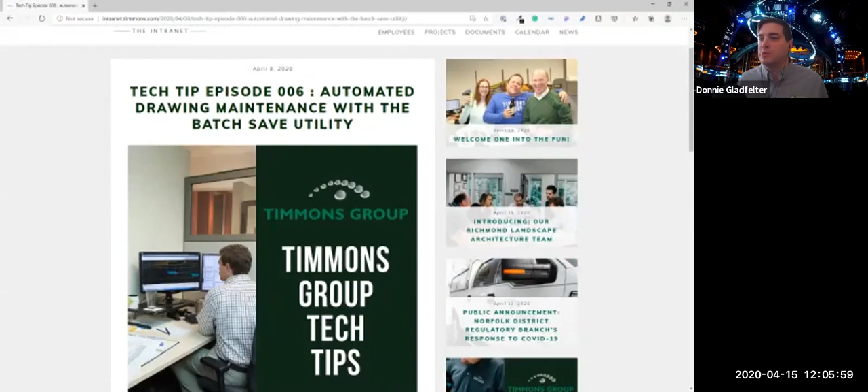If we come over here to Documents, we have all of the tech tips published right here as well. So here you can see all of the various tech tips, go back and see past episodes, or just search for tech tips. Here's the latest tech tip, which is focused on a lesser known utility of Civil 3D called the batch save utility. We'll hit on this during today's presentation as well, but if you haven't already, I encourage you to take advantage of this resource.

Next, we have the targeted training, which is what I like to refer to as this style of presentation, focused on something a bit more tactical and specific. It's not the broad sweeping 'learn how to use everything in AutoCAD or Civil 3D' approach, but instead focused on a particular area. And like I said, there are a few other things coming soon.

Speaking of training and what's coming soon, there are two things I'd like to share. Hopefully you saw my email sent out yesterday, but we're going to be doing another one of this style of presentation next week. That one is going to be 'A Match Made in Coordinates,' bringing Revit, Civil 3D, and InfraWorks together at last. This is a topic many of you have reached out to me and asked about. It's also a presentation I've delivered at Autodesk University, so we'll be doing a cameo appearance of that presentation next week.

This is about trying to georeference Revit models and making our Civil 3D data flow more easily into Revit and vice versa. We'll be hosting that presentation same time next week, except we're going to shift things to Tuesdays instead. So next Tuesday at lunchtime, we'll be delivering that presentation.

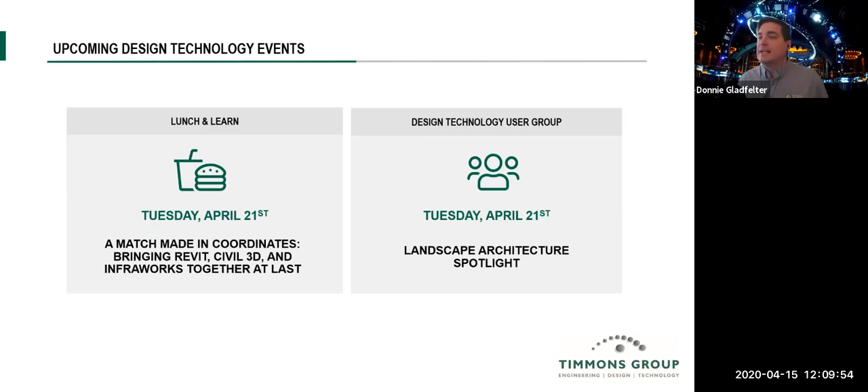So enough of the talking head piece - let's get into really the meat and potatoes of the presentation today. In terms of learning objectives, these are pretty broad, because really it's about finding ways maybe that you hadn't explored before to better leverage AutoCAD in some capacity.

Now with that said, I always like to put the disclaimer out there for tips and tricks webinars: my expectation is if you are an AutoCAD user, you probably know at least some of the tips I'm going to share with you today, but maybe you don't know all of them. So hopefully there's at least one or two things you can take back to your desk after today's presentation and put to work. And of course, if you have ideas above and beyond what I share, I'm curious and eager to learn from all of you guys as well.

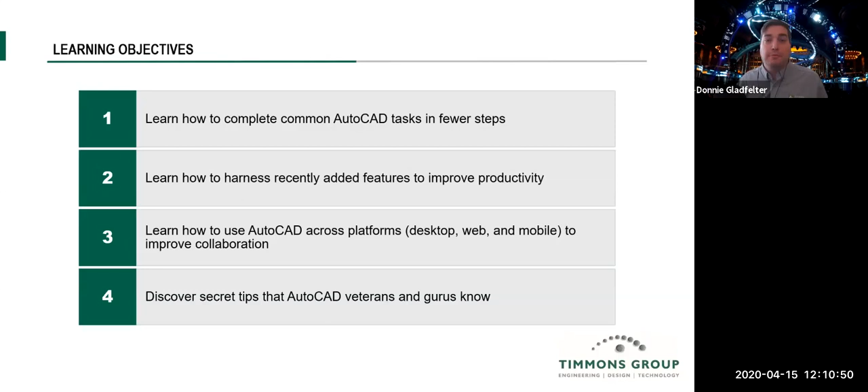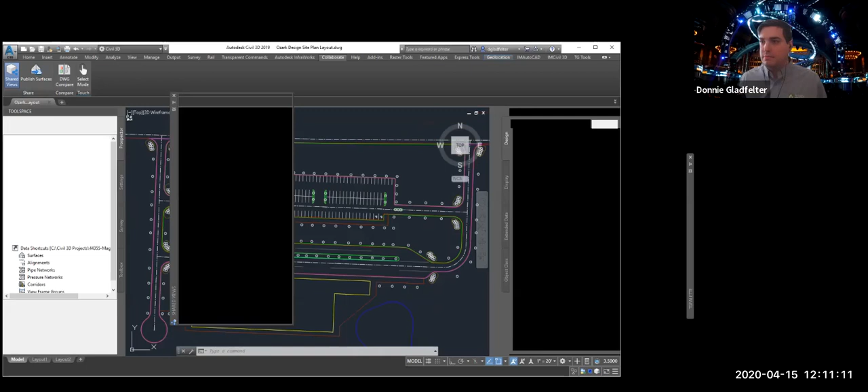All right, so let's jump on over to AutoCAD. Let me maximize this, and let me get my notes up on my other screen here. Okay, so let's do this. All right.

So I'm going to start just with some basic user interface stuff. We all like to personalize and make the user interface our own, and that's awesome. A few annoyances that I have - one of the first, especially being on the civil side, is that the default user interface no longer has our coordinate readout.

Now, this was one of the tech tips early on, but just a very quick and easy tip here: if you click on this little hamburger icon, as they call it, down here in the bottom right corner - right there - you'll have all of the various things that we can add to the status bar displayed to you.

There's a couple others I'm going to share with you here too. The first one is just to add the coordinates. That will give you a coordinate readout at the bottom. If you haven't discovered that one, that's a really helpful tip. As you mouse around in the software, what you see down there will be the coordinate readout for your project. That's super helpful, I think incredibly required, especially in the world of civil engineering drawings.

So let's take a look at a few others here. I'm going to pick on the sample surface in this particular drawing. You're probably accustomed to using the full properties palette over here. I typically dock it on the right-hand side of the screen. You might choose to put it on a whole other screen entirely, totally up to you. As AutoCAD users, we are very greedy when it comes to our screen real estate, and that's totally fine.

Now, something else we have available is quick properties. I have it turned off right now. This is another one of those things that if you don't see it in the status bar at the bottom of your screen, you can pick on that little hamburger icon.

As an aside, I don't know why people call it a hamburger icon. I see more of a stack of pancakes. I don't know who's team pancake, who's team hamburger. I guess it depends if you're a breakfast or lunch guy. But this is a lunch and learn, so maybe it's better calling it a hamburger icon.

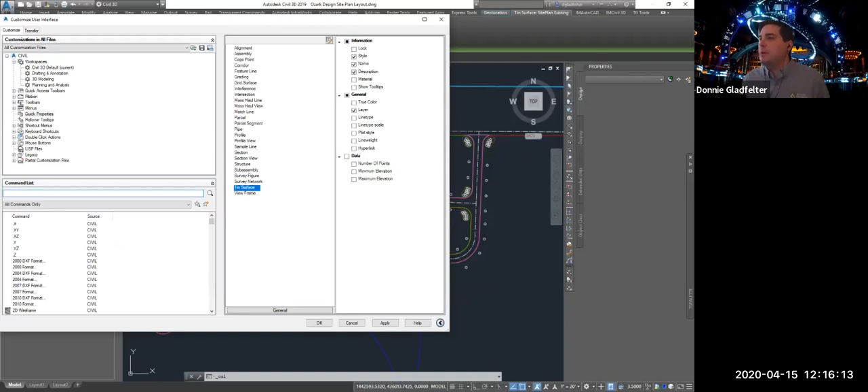Now, out of the gate, this looks a bit intimidating. I totally get it, it takes a little learning and acclimating to make it useful for you. But nonetheless, all of those properties I saw, let me pull this down a little bit, see if it'll let me resize it. Here we go. So all of the properties I saw over here in the full properties palette are also available to me right here as well. In my case, I liked all of that data information, I found it useful, so I can just go ahead and check those on.

Okay, I'll go ahead and commit those changes. Now when I pick on my surface, the quick properties that it displays will include those additional properties.

So I can see the number of points, and I can validate and verify that I don't have any bad shots in the surface at elevation 0 or something along those lines. Again, you can customize anything that this shows. I think that's super helpful.

All right, so we'll continue down this path of the user interface for a bit. The next drafting aid that I find incredibly helpful is something known as selection cycling. This was a new feature several years ago. Autodesk made a big splash about it, and then they took it out of the default status bar. I don't get the logic, but nonetheless, it's not here by default.

But in our civil engineering drawings, where we all know a civil engineering drawing is not complete unless it has 987 layers inside of it and an equal number of things drawn on top of each other, if you're trying to make sense of all that chaos, selection cycling will be your friend.

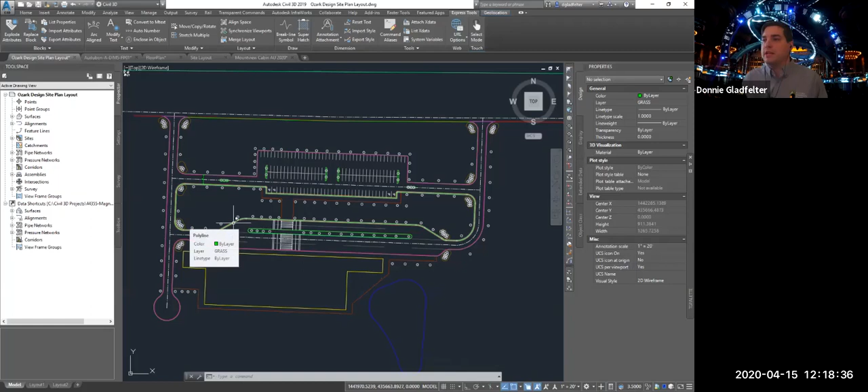So Murphy's Law says as you try to select something in AutoCAD, it will select the object you don't care about. What you'll notice is when I hover over things inside of AutoCAD, there's a little glyph now that pops up by my cursor. Whenever you see that, when you have selection cycling turned on, that means AutoCAD is a little confused about what it is you want to actually select. So we can leverage this to our advantage.

So when I pick on this now, what I'll get when I have selection cycling turned on, this guy right here in the status bar, I will get this little menu, and it will let me cycle through all the stuff that AutoCAD thought I may have wanted to select in the first place.

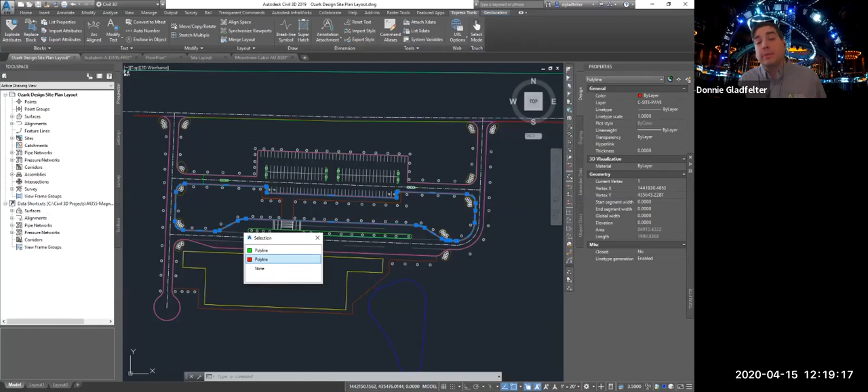So again, maybe I wanted the edge of pavement line, which I happen to know in this drawing is red. We can go ahead and pick that right here, and just like that, we have that object selected.

So again, in civil drawings, I find selection cycling an incredibly helpful tool.

All right, so I'm going to bounce around in drawings here for a minute. I'm not sure how folks typically address this, but there's the great debate among AutoCAD users as to what we set our LT scale at. This seems to be one of the really hotly debated topics: do you set LT scale to the model scale, what do you set PSLT scale?

So just a quick bit about line type scale, or LT scale as we abbreviate it in AutoCAD. There are actually 4 LT scale variables inside of AutoCAD. The first and foremost that everyone knows is just regular LT scale. So if you type in LT scale, that's going to be your entire drawing's line type scale, affecting every line in the drawing.

Above and beyond that, we have 2 variables that complement that: one called MSLT scale for model space line type scale, and the second called PSLT scale for paper space line type scale. The 4th line type scale entity is called CELT scale, for current entity. Basically, it sets a default for any object you draw in the drawing. Not that you should ever overwrite the line type scale, but if you did, you could use that CELT scale to do that.

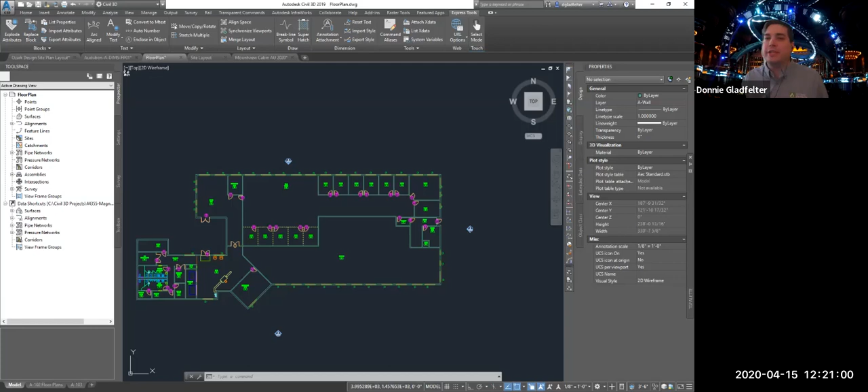Nonetheless, in this drawing, let me share with you my LT scale setup here. In this case, the LT scale right now—this is an architectural drawing, so the scales are a little different from what we're accustomed to—but it's set to 96, which in architectural world equals a 1/8 scale drawing.

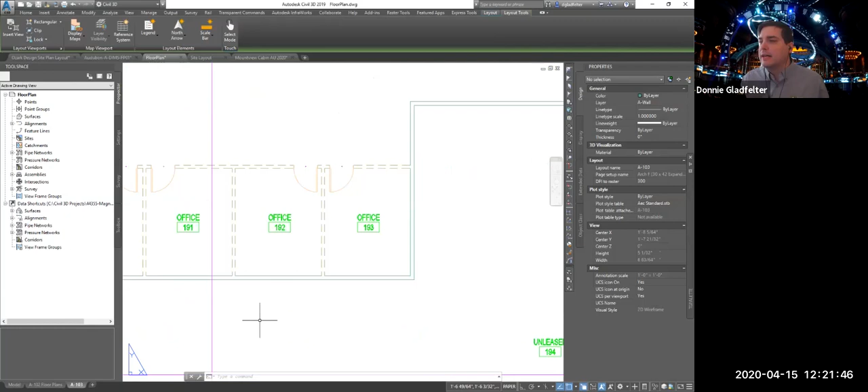Now, this is fine. Everything looks great here in plan view or in model space, but as soon as I switch over to paper space, things start falling apart a little bit. You'll notice with these dashed areas, I have offices that are dashed and offices that are dashed, but these are far more dashing than these are. Generally speaking, I'd like all of my dashes to be the same length. So how can we do this?

Well, the secret here is just to use LT scale. Instead of setting this to the drawing scale - so in our drawings, a 50 scale drawing would be 50, a 30 scale would be 30 - you would set it to the 1 inch equals X number of feet. That X number of feet is what you would typically set LT scale to.

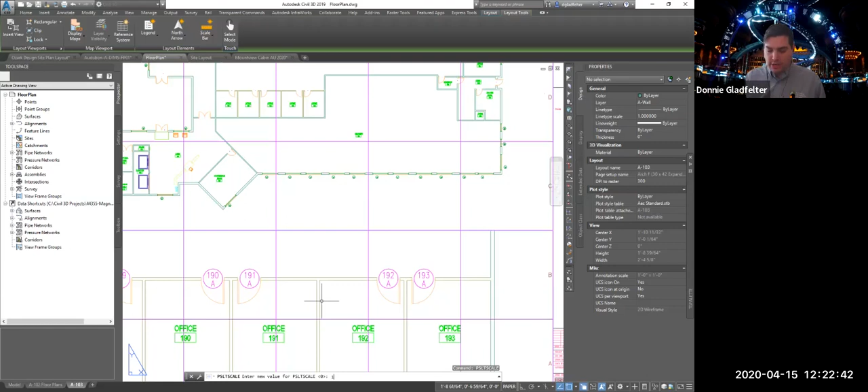What I'm going to do here instead is just set this to 1. Now, that makes things worse. So we have another variable here called PSLT scale, and I'm going to go ahead and change that from 0 to 1 as well. Now, if I do a quick regen, you'll notice that these lines should now be the same, and for some reason they're not. So let's see what's happening here.

That looks correct. And that is troubling - my annotation scale is off here. Anyway, the beauty of live presentations. So PSLT scale, assuming that your annotation scale is correct, and for some reason AutoCAD is not letting me change that here.

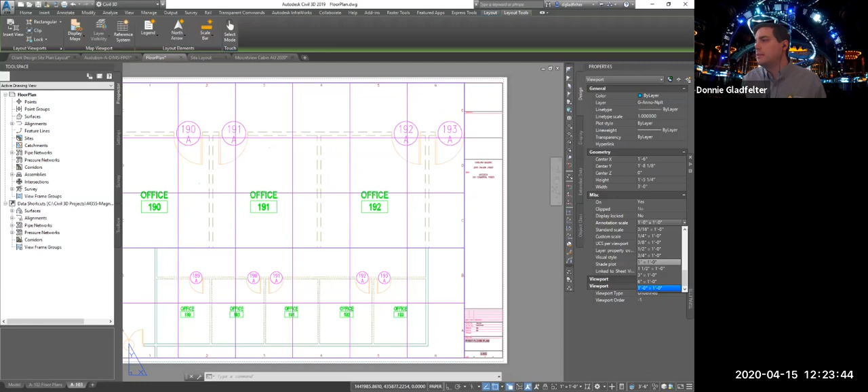If I look at the viewport, you'll see that we have a standard scale and an annotation scale. Oh, I need to unlock my viewport - that's why. Let me unlock the viewport and set this to a 1/8 scale. There we go. So we'll set the annotation scale and the actual viewport scale to 1/8. And let's just verify this one is the same. Now you'll notice that both viewports are exactly the same.

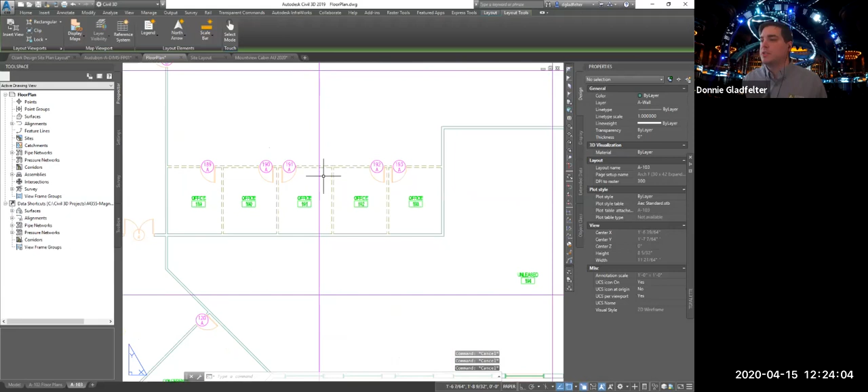Now that's good. So we've kind of solved one problem, but we've also now created another problem, because when we come back here to model space, where I'm typically spending most of my time, this line now appears continuous right here. So how do we fix that?

So this is the third variable that fewer people know about. Most people know about LT scale and PSLT scale, but the third variable that is helpful here is MSLT scale. If we set this to 1, what it's going to do is take a look at whatever I have set here as my annotation scale, and it's going to use that. So let's just do a quick regen here, and you'll see that those lines are now dashed as well.

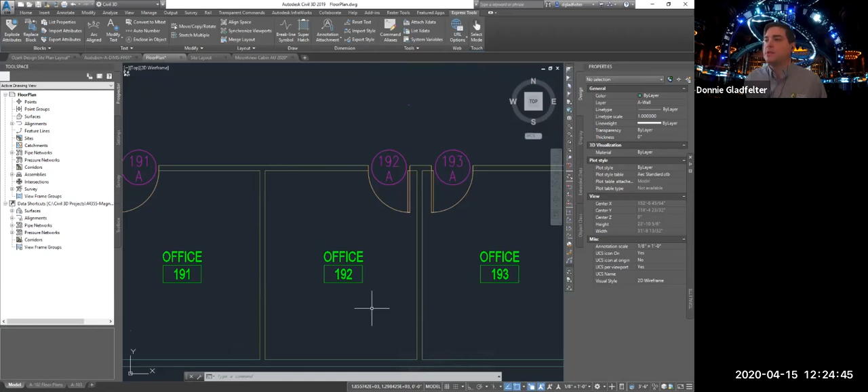So everything should match. Long story short, when it comes to line type scale, you can put things on autopilot by setting 3 variables to 1. The first being LT scale, the second being PSLT scale for paper space, and the third being MSLT scale for model space. Set all 3 of those to 1, and line type scale will more or less be on autopilot.

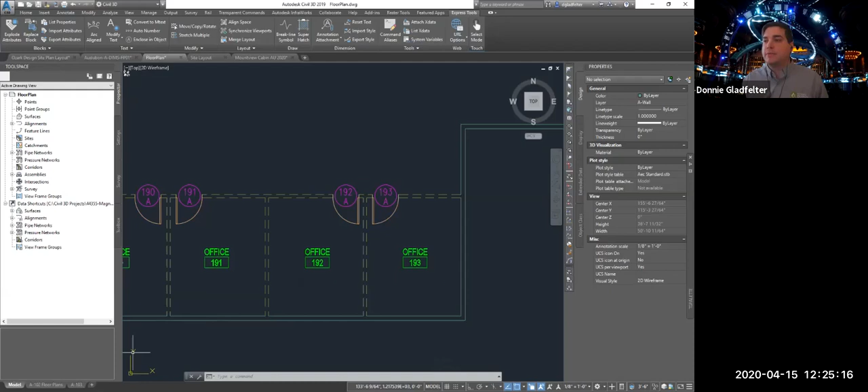So while I'm in this drawing, it's not uncommon for us to take one drawing and use it as a template. We'll copy it and modify it to look at maybe another area of my drawing, whatever the case might be there. So typically we would right click down here on the layout tab, and we would come in here and...

I'm looking for the move or copy option here and I don't see it. Anyway, that doesn't matter, because what I'm going to show you is an easier way here.

If you press and hold your control key and then left click on that layout tab, you can just take it and copy it just like that. So now I have 2 layout tabs. If you need to make multiple copies, you can select multiples by pressing and holding the shift key, and that will highlight all 3 right there. And now if I press and hold the control key, you can just drag and drop this over and it will make copies of all 3 of those layout tabs right there. So again, I find that a bit easier to do.

As a bonus, that also works inside of Excel with worksheets. Same thing with the tabs at the bottom - you can use the control key to left click and copy a spreadsheet.

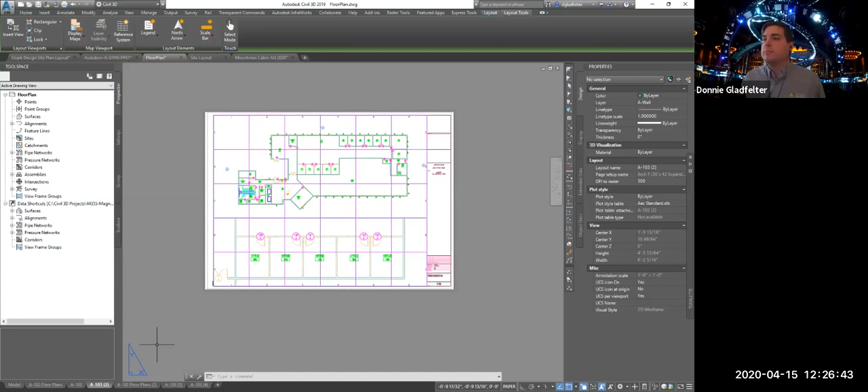Helpful bit there. All right, let's get back to our regular plan here and take a dive into things. So let's take a look at a few annotation bits here inside of AutoCAD. The first one I want to take a look at is dimensions.

So here, if I zoom in, I have just a lone dimension that I have conveniently planted in this drawing, and right now it says 25 feet. Now I'm a little suspect about this because if I come over here and use my distance command, and I do a quick distance like so...

I get a much different dimension here. You'll see at the bottom of my screen it says 26 feet. So if I try that again and measure things now, you'll see right there it says 26 feet. Well, my dimension here says 25 feet. What is going on with this?

Well, if we take a look at the properties here, we can see exactly what's going on, because we can take a look at the text override right here. So right here we have our text override, and you can see that somebody has entered in a value of 25 here. Probably not the best thing to do. Hopefully this doesn't happen to you, but we all know that it does.

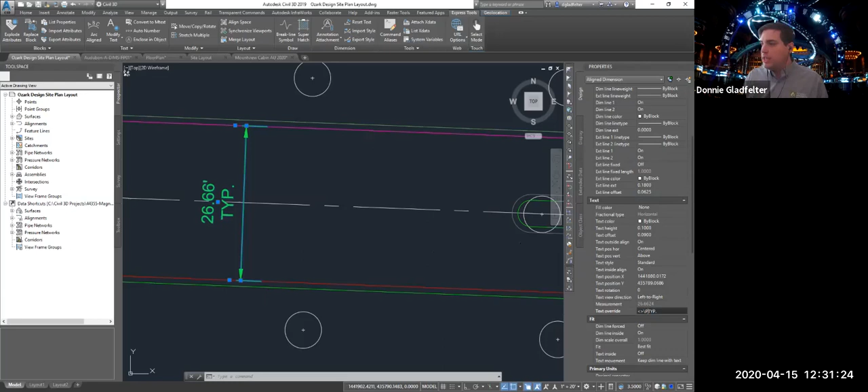Well, if I wanted the note to be below the dimension line, change that P to an X right here. So if I do the greater than less than brackets, slash, and I change the P to an X, we'll go ahead and hit enter, and you'll see that the dimension is now above and below the dimension line, which can be super, super helpful in that regard.

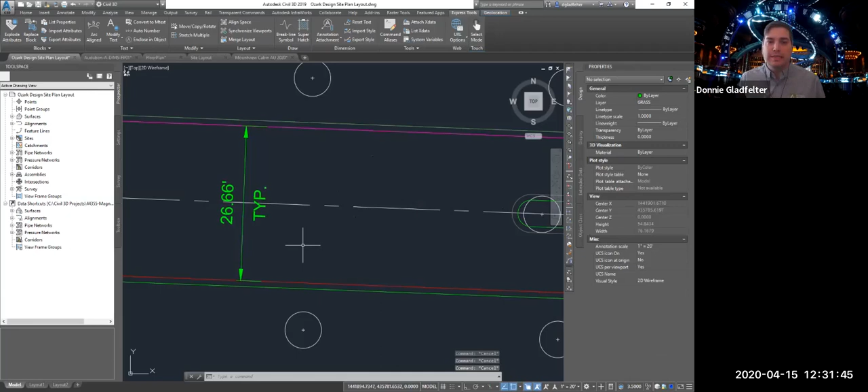All right, let's continue with a few other annotation bits that can help us out here. I'm going to switch over to another sample drawing. Something we oftentimes need to do is change block attributes. Here I have an architectural drawing, but it could be anything. This is just a regular block reference, and it has an attribute inside of it.

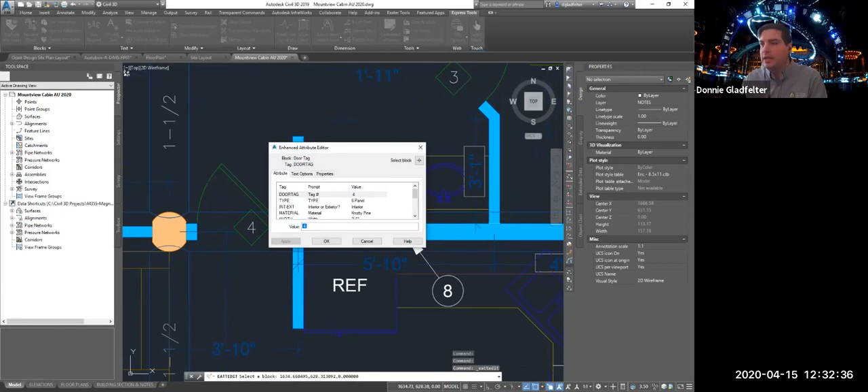Typically the way I'd modify this block attribute is to double click on it, which brings up the enhanced attribute editor. It allows me to modify any and all of the attributes associated with this particular block. This is all fine and good, but what if I just wanted to quickly and easily change this one piece of text here?

Well, the secret is to press and hold the Control key. When you do that and double click on the block attribute, it will allow you to modify just that attribute. You suppress the enhanced attribute editor, and instead you can modify it like regular text. So press and hold Control, double click on the text you want to change, and you can change it to whatever you want.

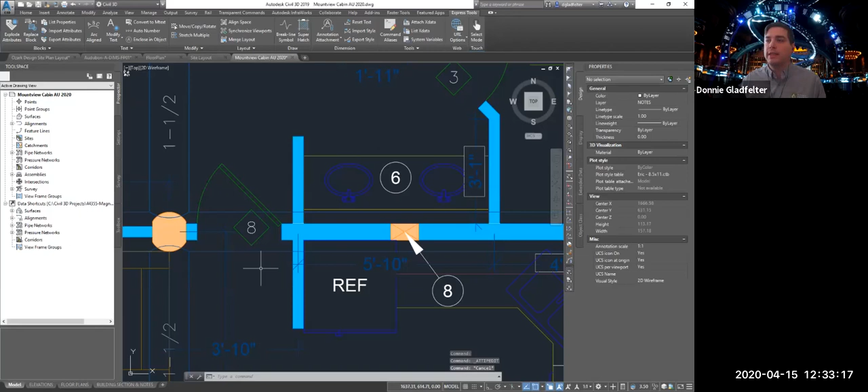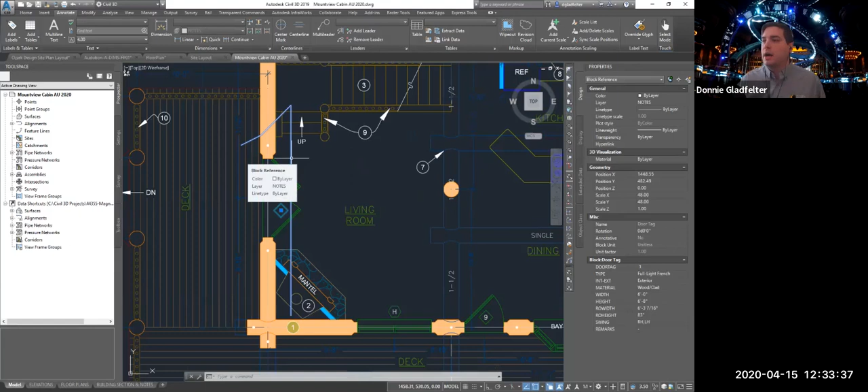This wasn't part of the original schedule, but since it happens to be an issue in this drawing, we'll take a look at it. Here I have a block attribute that has kind of gone wild. For some reason the text or attribute itself has supersized, and the block itself is down here. What's going on here? This is actually a pretty simple fix, but one that can puzzle you otherwise.

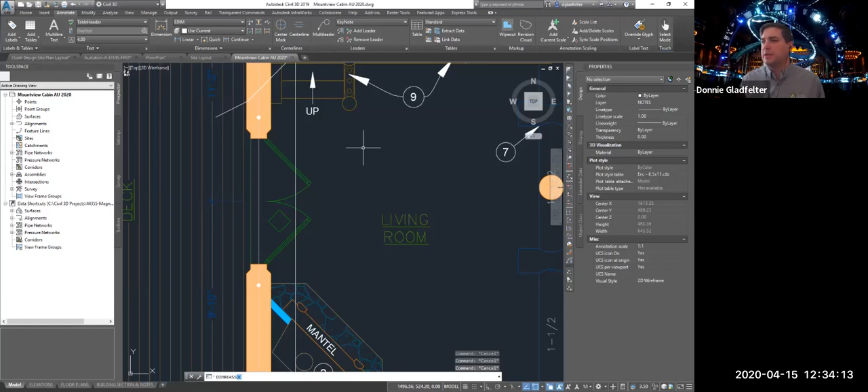This is where we can use... should be the dim update, sorry, let me try the dim reassociate, I think that's actually a command... oh, ATTSYNC, sorry. ATTSYNC is the command for this. I'll hit select and then pick on this. We'll sync it, yes, and it's back to normal. So ATTSYNC is the command for that.

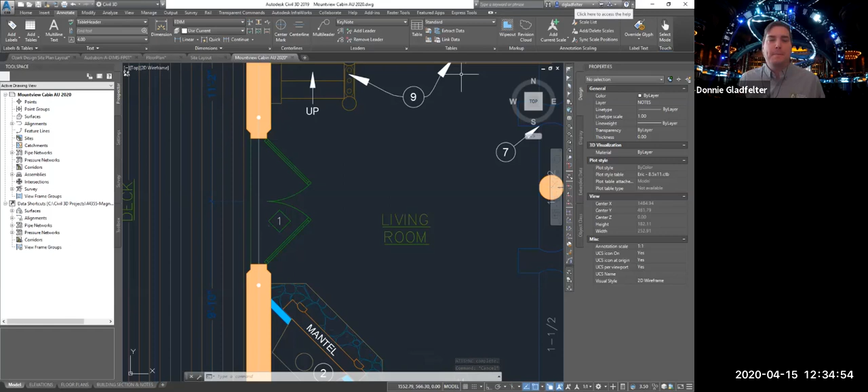I was drawing a blank myself, and I'm not sure exactly where that is in the ribbon, which brings me to another piece I can demonstrate since I've gone off script a little bit. If we come into the help file and you're trying to figure out where a command is in the ribbon, you'll of course get the help documentation about that particular tool.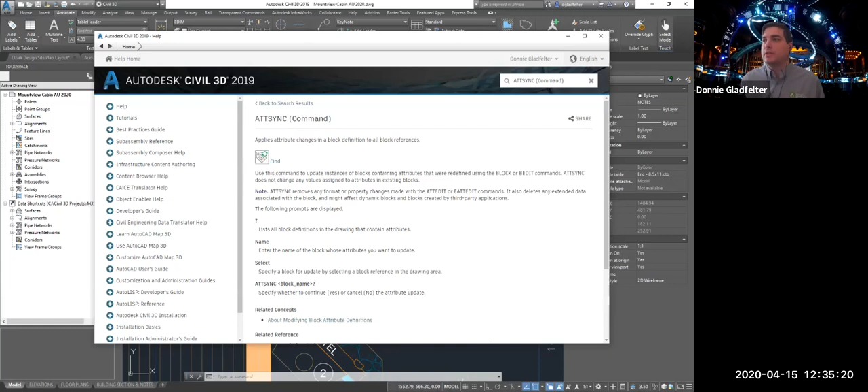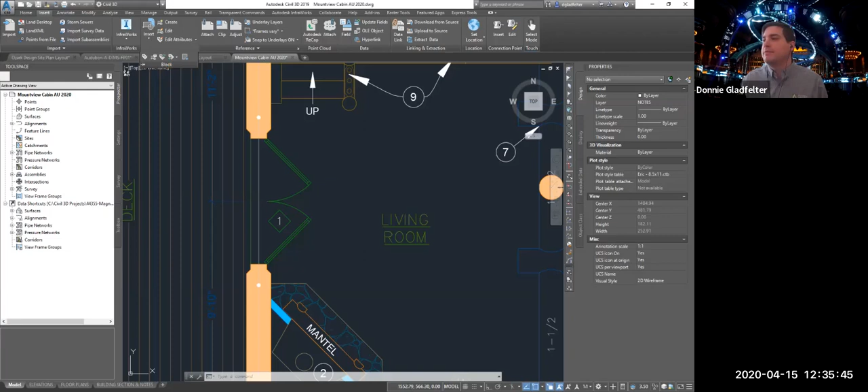Since I wasn't able to find it here for whatever reason, you'll notice in the help file there's a Find button. If you're trying to find something in the ribbon, hit Find, and it will switch over to the appropriate tab for you. I was looking on the Annotate tab, but I needed to be on the Insert tab, under Block, in the expanded Block panel, where the ATTSYNC command is. It gives you a little arrow that bounces up and down, showing exactly where it is. So if you can't find things in the ribbon, search for it in the help file and click that Find button.

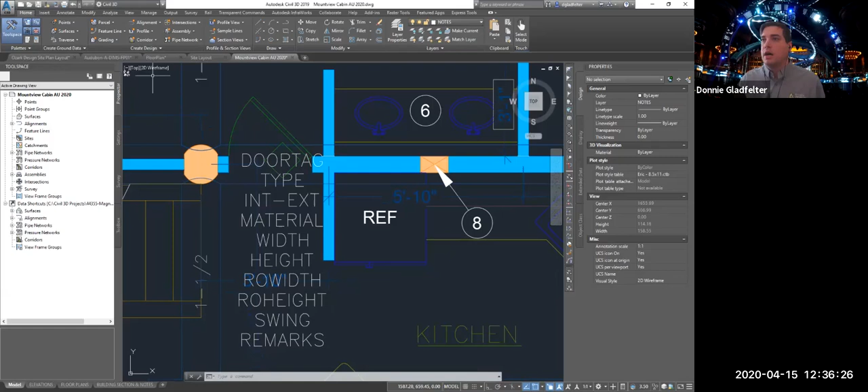Continuing on about block attributes: if I were to come in here and explode this block, I'll use the Explode command and pick on this one. When I explode a block with attributes, I get all of the attributes - probably nothing close to what I was expecting when I hit explode. So I'll use everyone's favorite AutoCAD command, Undo, to undo that and get it back to being a regular block.

So another helpful tip here - not that you typically want to explode block attributes, but I know on occasion it is something that we need to do.

This is another one where I'll turn to the Express tools to help me out. Under Express tools, we have a blocks panel, and the very first tool on this is explode attributes to text. The command for this, if you want to type it, is burst.

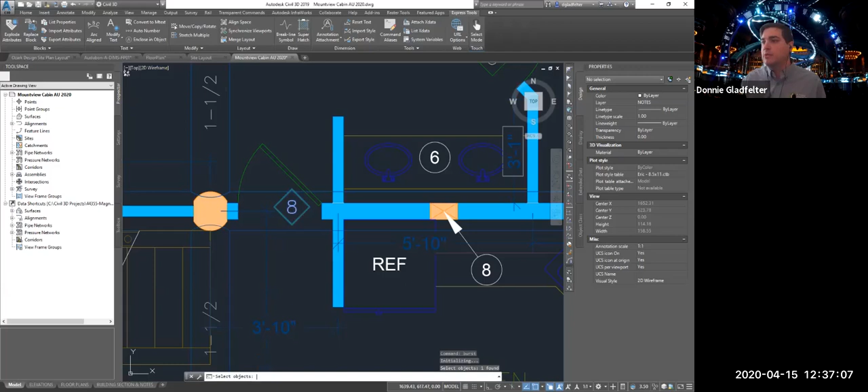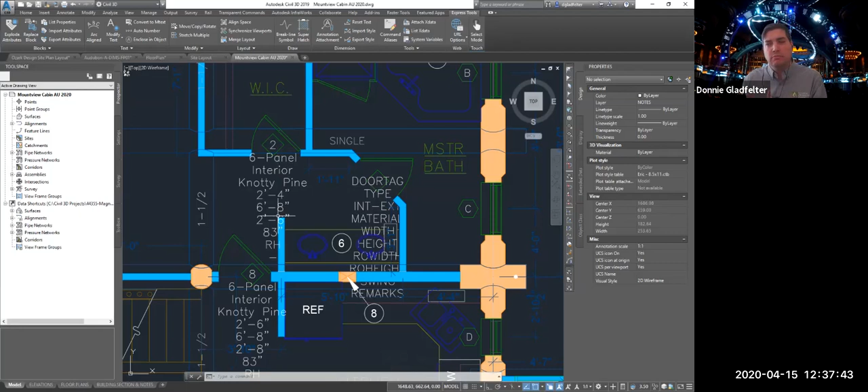If I go ahead and pick on that, I can now pick on this block. I'll hit enter, and it will not do what it was supposed to do. Let's try that on a different one here. It was supposed to just give me what I see in the drawing, and that is curious. It did show the value instead of the block attribute tags. When you run the regular explode command, it gives me just the tags, not the value, versus when I used burst, it gave me the values, but it typically only shows the attributes that were displayed by default, not the invisible ones. For whatever reason, AutoCAD is not doing what it's supposed to do in this regard, but that's okay.

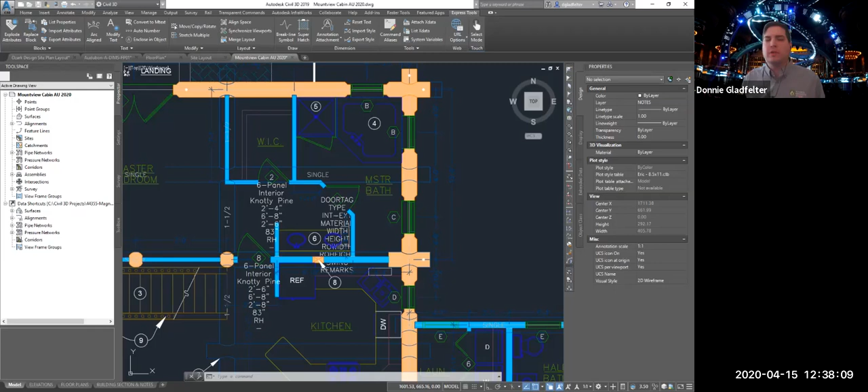Let's continue on here and take a look at a few other bits. Collaborating with external stakeholders, we have a number of ways to do this. Let me switch back over here to this plan. When it comes to soliciting input or feedback about a design, we have a lot of different options.

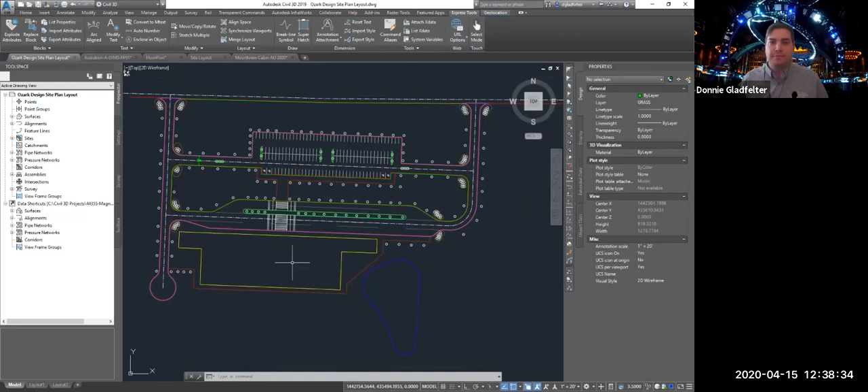We can, of course, PDF that document. We can send them the whole drawing file. A lesser known bit that can be helpful for just sort of those from-the-hip kind of collaboration pieces is something called shared views. This is a relatively new AutoCAD feature, but if we come over here to the Collaborate tab, under shared views, we have share, and we have a shared views command.

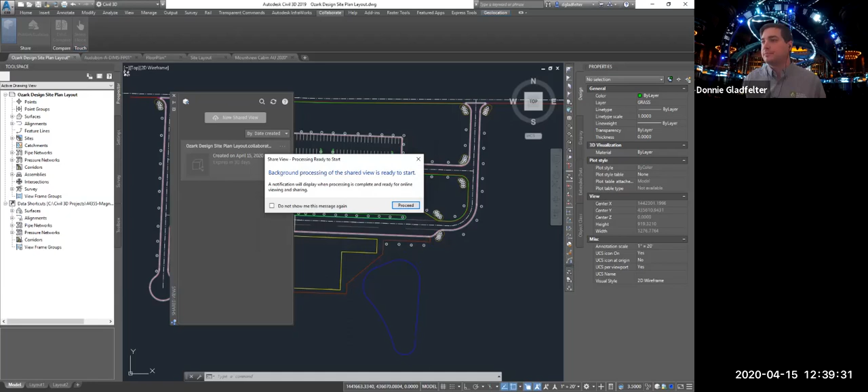What AutoCAD is going to do is in the background, it's going to send this up to the cloud and begin processing it. It won't take too long, though it takes a little bit longer than I want for a live presentation. Once it's done, you'll see something like this right here. What I can do is copy that link and email it to whomever I need to show or share this with. But I can even myself say view in a browser, and this will open up my web browser and take me to the Autodesk viewer.

That did not show as intended. It says the new one is done. Let's see if this one did any better. Okay, so both of those failed, which is awesome.

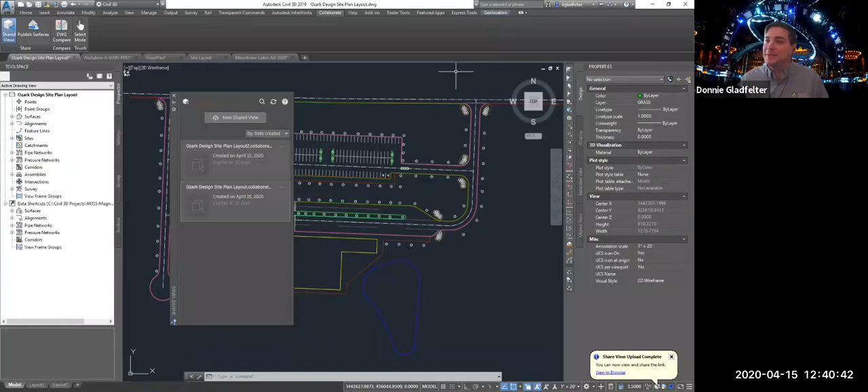Nonetheless, you can share the shared views and it will typically show the floor plan. Let's see if I try this drawing here and share it, if it does any better. I'm not sure, I'll let that run. It's a really handy bit because it will essentially give the person access to view your AutoCAD file, but they can't download it or do anything with it other than view the file. That could be a really helpful piece here when, of course, it works. But again, sometimes live presentations don't cooperate, so it's publishing down here. We'll let that run.

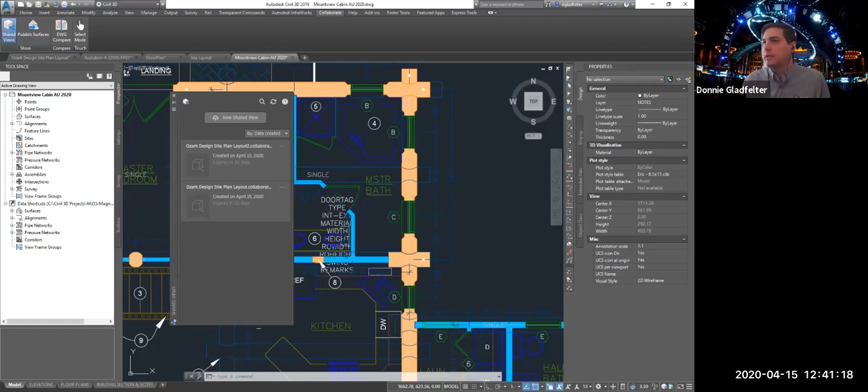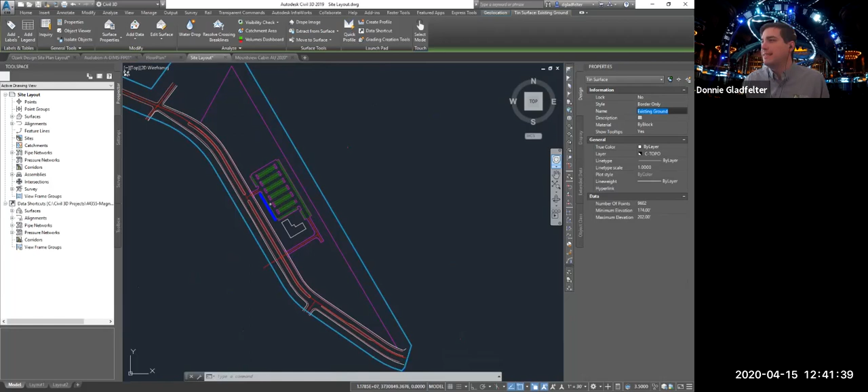Continuing on, let me get back here to my regular project. Here is a really simple civil drawing that I've got. Let me go ahead and set this to a style that will show me some contours, so I'll do 1 and 5 background like so. Okay, so that shared view finished.

Okay, so apparently the shared view is not working at all today, but anyway, we'll carry on. So when sharing drawings out, let's see. Sorry, I see some bits in the chat here. You're not allowed to access.

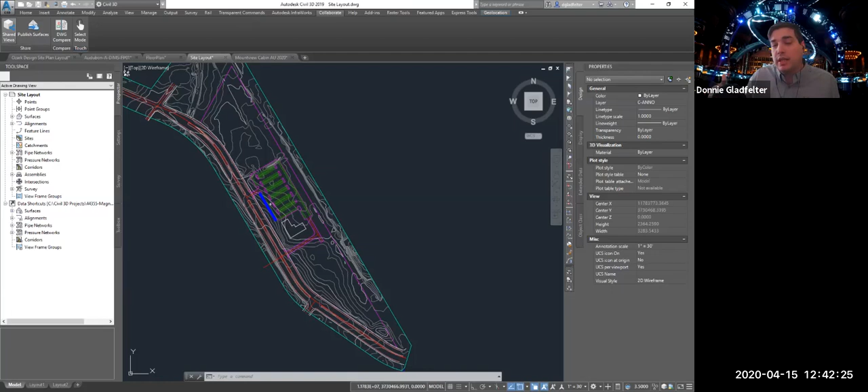Okay, so the shared view command is right here under Collaborate, Share, Shared Views. The way these work is they are available for 30 days, so they do just kind of die off after 30 days. You can renew them as much as you need, but it can be a really helpful piece for sharing a drawing, especially internally if you need someone's feedback on something.

And regarding getting it set up, you do have to have an Autodesk account, and we can work that out if you would like to use that feature.

All right, so talking about collaboration and sharing, as most of us know, Civil 3D drawings are their own animal. If I'm sharing with somebody who isn't using Civil 3D, I probably don't want to send them the actual Civil 3D drawing - I probably want to dumb things down a little bit.

And in order to do that, we have a couple of options. What I'm going to do is come up here to the application menu, the big A in the upper left-hand corner, and under Export we have the option to export a Civil 3D drawing. This is probably the easiest way.

We have the option to export to AutoCAD, or technically we can export to MicroStation, but our MicroStation users would tell you that if you need something in a DGN format, contact the folks in transportation and they can help you open it up in MicroStation and save it that way - it doesn't do as good there.

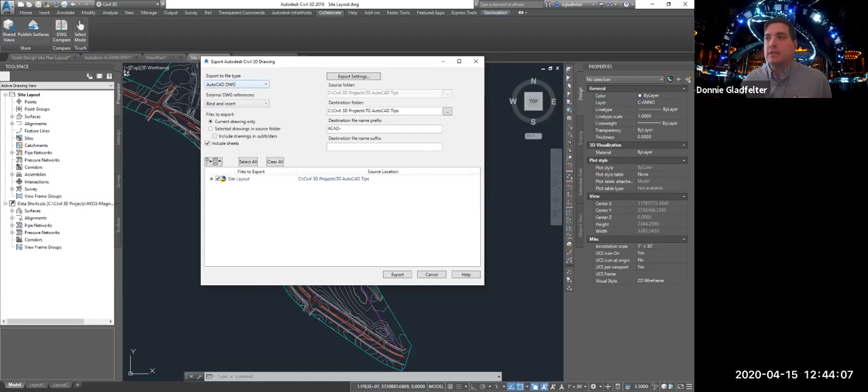But anyway, for just saving it down to a vanilla, base AutoCAD drawing, we can export to DWG right here. We can choose what is exported, and we have some basic options for how to export things, like what file version - this is the regular AutoCAD file version I want to export to.

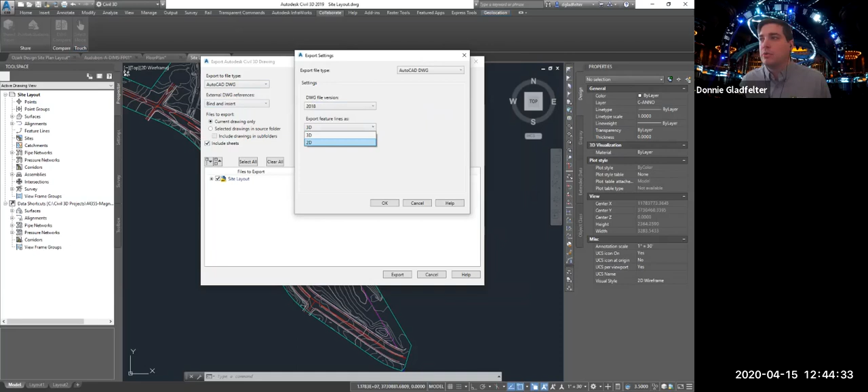We can choose what happens to feature lines - do they become 3D polylines or just 2D entities? So we have some control here over what happens. I can just go ahead and hit export, and it will take whatever is shown in the current drawing and, in essence, run an explode on all of your Civil 3D objects. It's also why it creates a new file. We'll let that run here real quick.

It's almost done here, and I can open this up in just a moment. I shouldn't have included sheets - I think it's exporting the individual sheets as well.

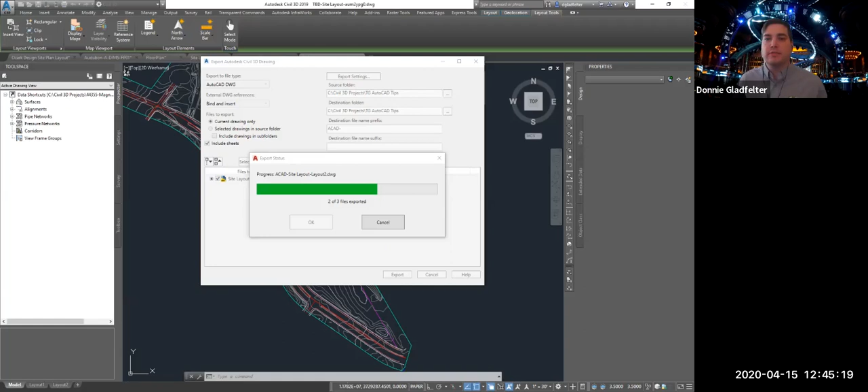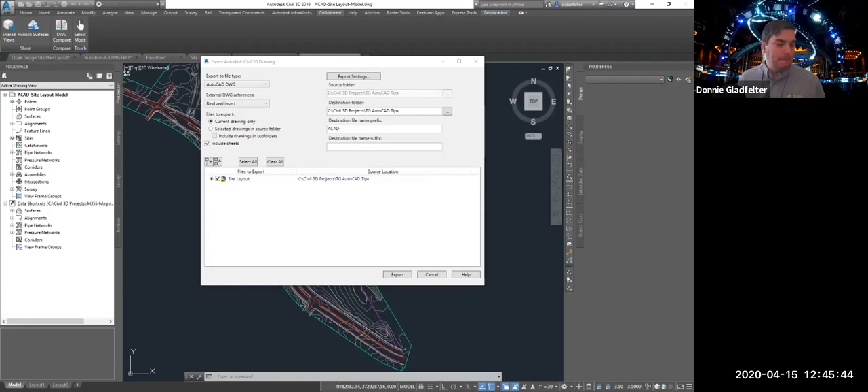Anyway, once we let that run, I will open up the base model drawing here. There we go, we'll say OK. Let Civil 3D catch up here. There we go, so I'm going to close out of this - this is the file that it created.

And you'll notice now when I pick on things, it comes across as just regular polylines and AutoCAD objects. So this is kind of the best way to share things out with folks who might need this document otherwise.

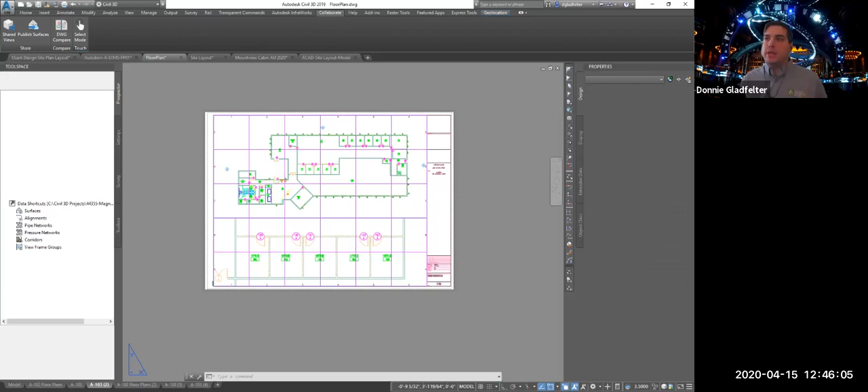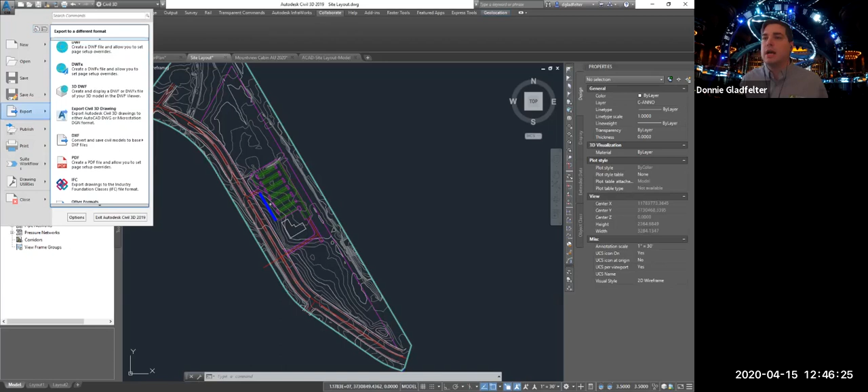The other way we have, which can be a little bit easier and better perhaps if you've got a bunch of drawings, maybe an entire project that you need to share with somebody, is the regular eTransmit command. Under Export here, we should have eTransmit as well. I'm just going to type in eTransmit, and this is going to open up a dialog.

The benefit here over exporting to AutoCAD is this will keep the XREFs intact if you would like. So here's the eTransmit command - this is going to pull up everything needed to show this file exactly as it is shown in my view. Now, by default, if you use the eTransmit command, it's just going to take the file and zip up all of the resources, but it's not going to dumb it down to a vanilla AutoCAD drawing.

If we want to dumb it down to a vanilla AutoCAD drawing, we can come here to Transmittal Setups, and I'm just going to go ahead and create a new one here.

I'll call this ACAD zip as an example. And what I can do here is choose how I want to transmit these. I'll do a zip file.

For file format, the default is to keep the existing drawing file format. But if you expand this out, this is the part that a lot of folks don't realize eTransmit can do, is we can set the target format. So 2019, 2018, 2020, and 2021 that just came out today, by the way, all use the 2018 file format. So we can say AutoCAD 2018 drawing format with exploded AEC objects. This is basically the same as running the export to AutoCAD. We can hit OK.

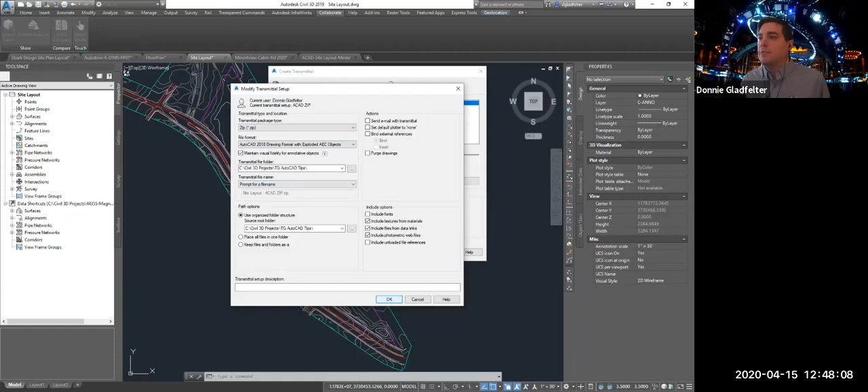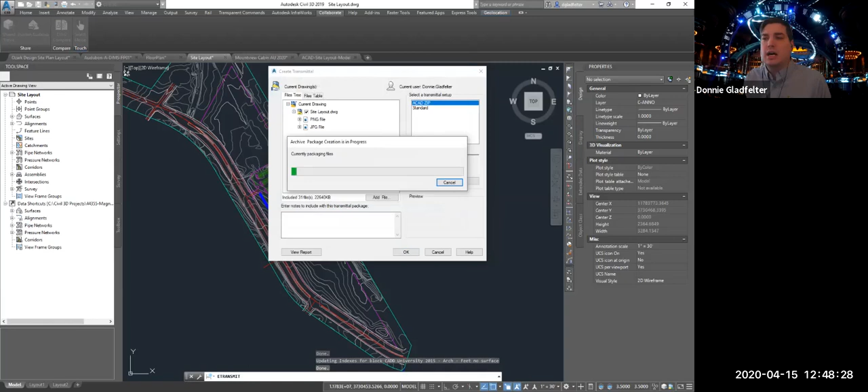This is going to create a zip file of all the stuff needed to show this drawing exactly as I see it on screen here. I'll say OK, and it's going to prompt me for a place to save this. We'll save this in this directory. And here you'll notice it's actually pulling up 31 total files so that this drawing can be shown exactly as it is in our version of AutoCAD here.

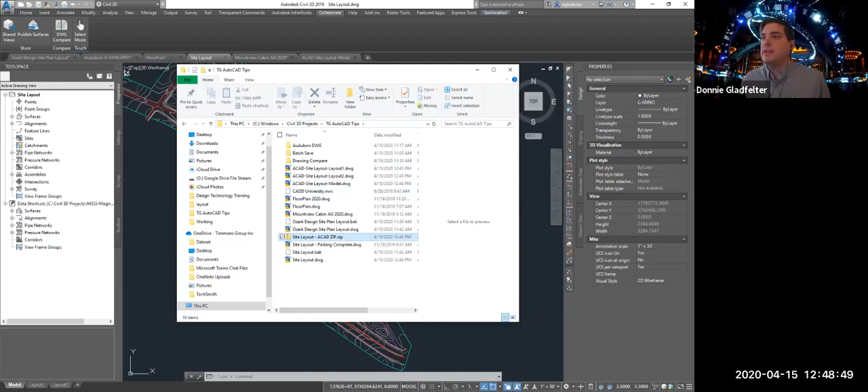If I take a look at that in Explorer here, you'll see the zip file that it created. And here it has everything that is needed. So there are some textures here for three-dimensional stuff to see. That is all right there.

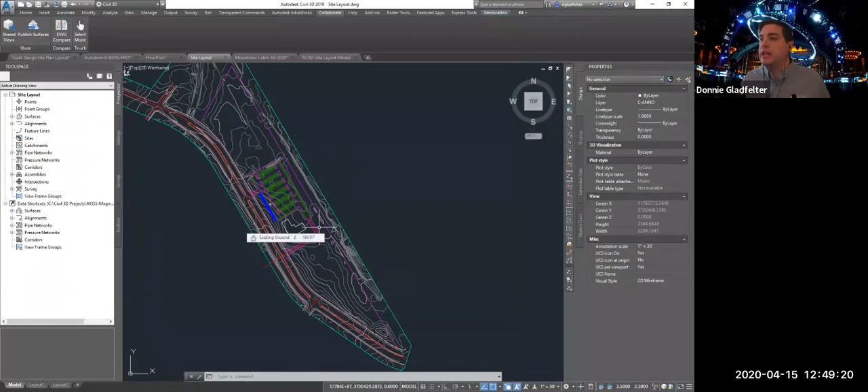Let's continue on here with some collaboration bits. While I'm in this drawing, this is a little bit of a sneak peek into some of the stuff we'll talk about next week, which is how to coordinate Revit and Civil 3D together. Here you'll notice I have just a basic building footprint, but there's nothing special to it. Yes, it happens to be at elevation, but there's no building here. What if I wanted to actually see the Revit model inside of AutoCAD?

Well, Revit does have the ability to export to a drawing DWG file format, even a 3D DWG file format. But if you take an entire building as a three-dimensional drawing, you're probably going to make AutoCAD explode on you. So what can we do instead?

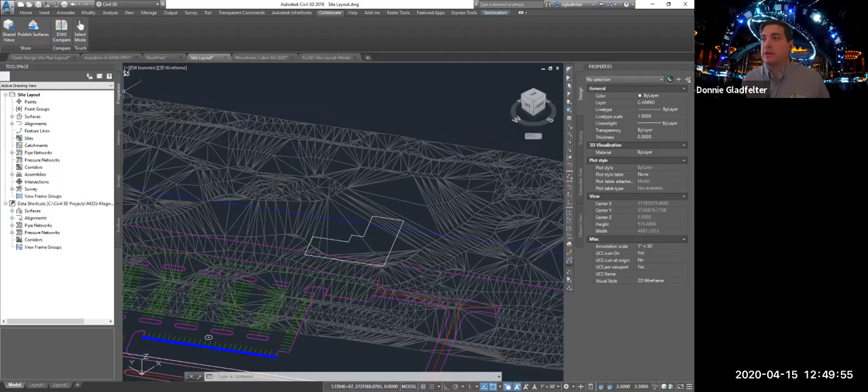A lesser known feature of the XREF command, or external reference command, if I come in here to attach, is the ability now—we typically keep this set to DWG files because we're typically attaching AutoCAD DWG files right here, so this is typically set to DWG. However, we also have Navisworks files. So here as an example, I have the Revit model for this site that I have exported out from Revit.

As a Navisworks file. So once you do all the drawing coordination stuff that we'll talk about next week, the architect can provide you with this NWC file, or you can create it yourself. I'll go ahead and hit open. This is going to come in just like a regular XREF.

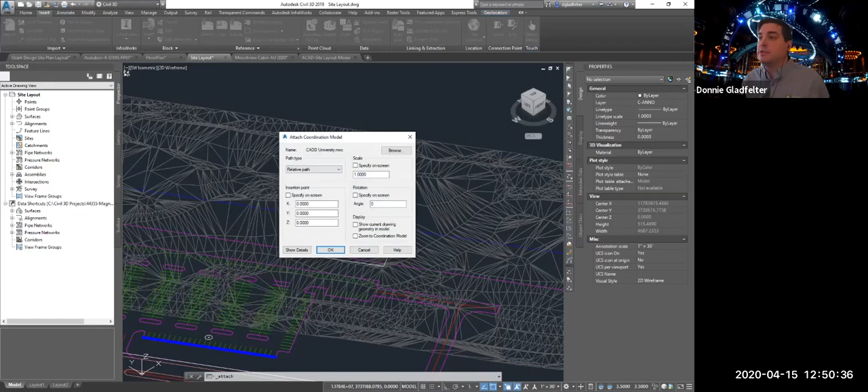So we're going to tell it the insertion point of 0,0,0 on screen because I've geo-referenced this. Just take the default, say OK. And just like that, we are going to get the Revit model to display inside of this drawing.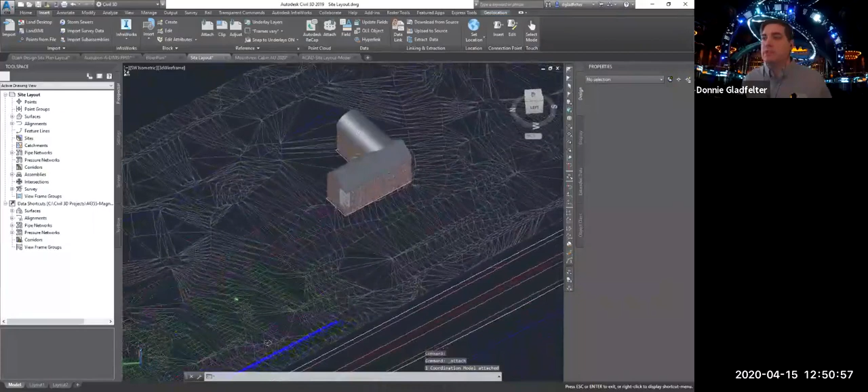And if I begin orbiting inside of this drawing, you'll see that it is showing the entire Revit model, and it's not really slowing down on me. I'm getting a little dizzy because I'm going upside down, but otherwise it is not really bogging down the drawing in any way, because that Navisworks format is a very efficient, lightweight format.

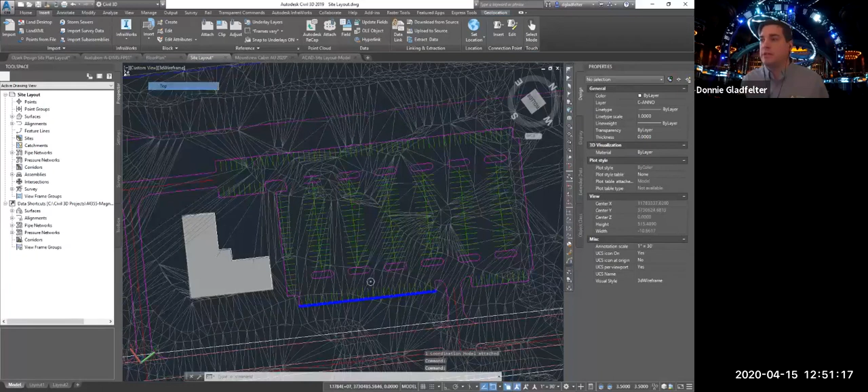So that can be a really helpful way of navigating things in that regard. The next bit that I want to show here is—and just as I say that, AutoCAD starts freezing on me. Let me switch this back to 2D, or just regular wireframe. That should help out a little bit. There we go. Just regular wireframe.

So the other bit that we have here—eek, it does not like me. All right.

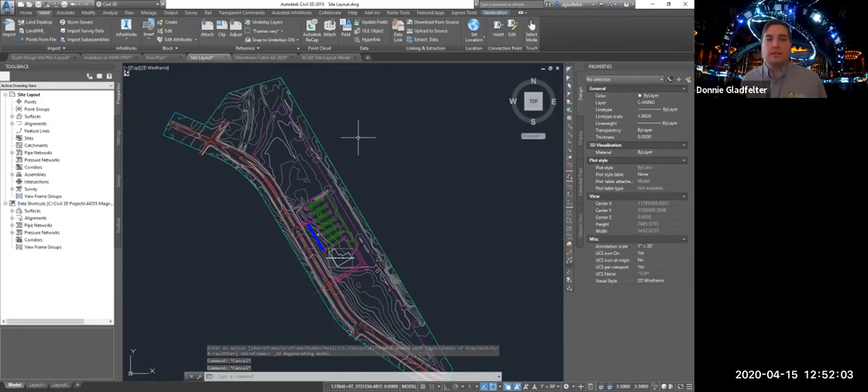Let's continue on here. Let me come back over here to this drawing file here. Actually, sorry, since I'm still over here, I'm going to continue using this drawing file here.

So this was another one of those tech tips that I shared with you, that we can get creative with something known as AutoCAD fields to calculate things like number of parking stalls. I know when I was in production, this was one of the tasks that I hated the most. So how can we make this a little less tedious? Here I have a run of parking stalls. I'd like to count the number of them in this particular drawing. To begin with this, I'm going to start with the calculator.

So I'll bring up the calculator here, under the palettes panel on the home ribbon tab. What I like about the calculator built into AutoCAD is that it has a distance command right here. So if you ever need to perform a measurement based on a distance that you measure in the drawing, we can go ahead and do that here.

So what I'm going to do is 1 divided by, and then use this distance command to snap between two of my parking lines here. In this case, I have 8.5 foot wide stalls. I'm going to get a value right here, this 0.117. I'm just going to select it and copy it to my clipboard. So that's it, we're done with that.

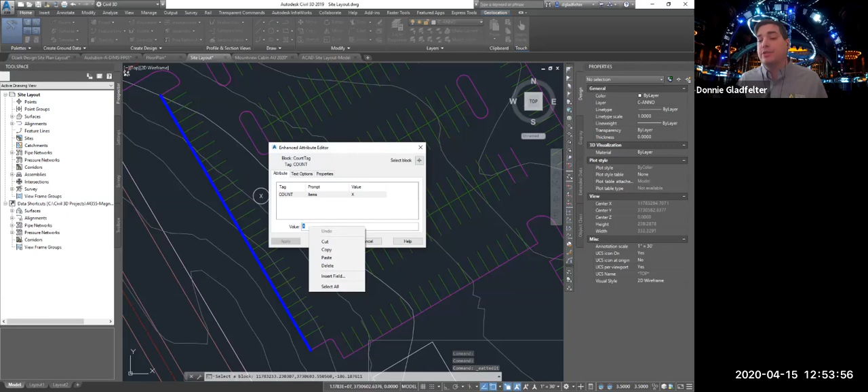Next, in order to begin calculating the number of parking stalls I have here, I'm going to come into this block attribute. I'll double click on this, which brings up the enhanced attribute editor. Here for value, I would typically count the stalls manually, but instead I could right click and get the option to insert a field. Let's try that here.

When we insert fields, fields basically allow me to read or query things about my drawing and display them as a string of text inside of the drawing. One of the categories we have for fields is objects, meaning we can take any of the properties of an object and display that as a piece of text in the drawing. So here I'm going to do objects, and choose object.

And since there's a bunch of AutoCAD objects, we can select object right here. To make things somewhat simple, I have a big bold polyline right here. I'm going to go ahead and pick on that guy. That just runs along the length of my parking stalls. Where am I going here?

Well, let's come over here to length. Again, this is going to be the total length of curb in this case, which is helpful in some regard, but this 222 is definitely not the number of parking stalls that I have. So what I'm going to do, just to make things simple so I don't get partial stalls, is round this to 0. So now this is 223.

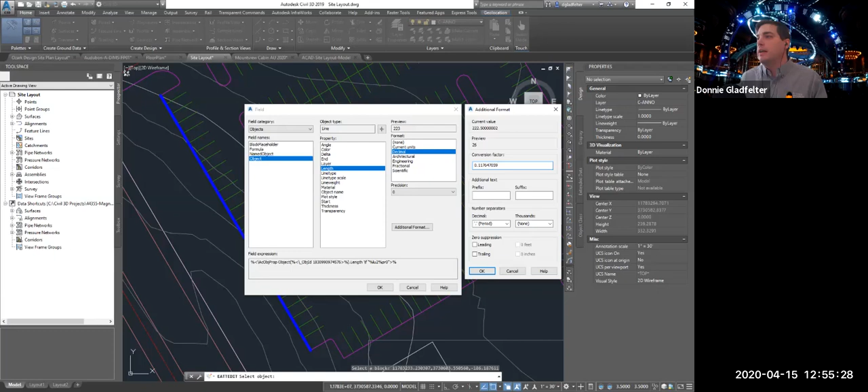I'm getting even worse. What I can do is come down here to additional format, and this is kind of the secret sauce - when you click on additional format, we have the option of a conversion factor. If I paste in that value I just calculated by measuring the parking width, 1 divided by the parking width, I paste that in here, notice I get a value not of 222 stalls, but instead 26. So I can go ahead and say okay, and okay, and okay.

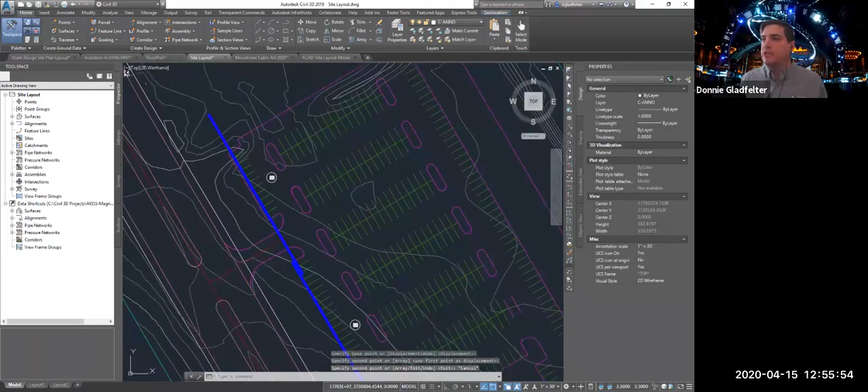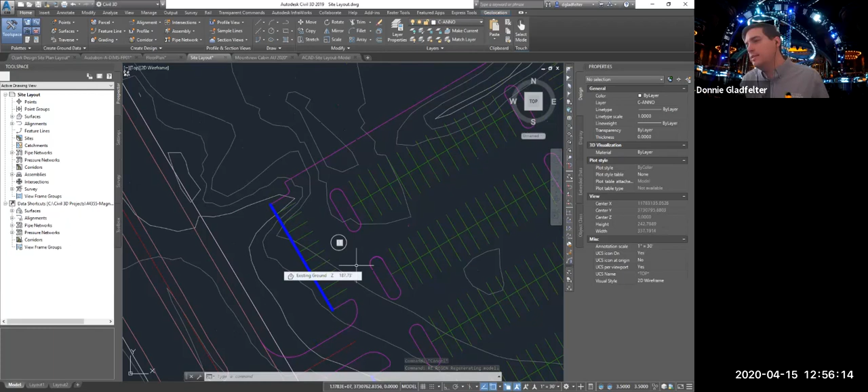So let's take this a step further here. If I come over here to annotate, I'm going to come into the table panel, and we have this guy right here, which is extract data. This is the data extraction command that, if you've discovered it, is a wonderfully powerful one. So I'm going to create a new data extraction table.

I'm going to call this parking. I'm going to hit next. What this is going to do is scan the entire drawing for stuff that we can extract data from. So there's a bunch of stuff here. Now, what I'm really interested in is just blocks.

I'm only interested in this count tag, which I'm using for my parking stalls, so I'm going to filter things down just to that block attribute. We'll hit next here, and what I'm really interested in is just the block attribute of count, so I'm going to find that.

This is counterintuitive, but I'm going to pick on the object I want, then deselect it, because if you right click, you can choose Invert Selection, which will pick just that. What this does now is go through the drawing and find all of the block attributes and their values, dynamically read based on the width of the stall here. We can create a table out of this.

What can be really helpful, though, is we can take this further. If you right click here, we can add a count column or a totals column. Let's see... it's not showing me the number because I don't think it's considered a number just yet, so I'm going to multiply this times 1, which should validate it.

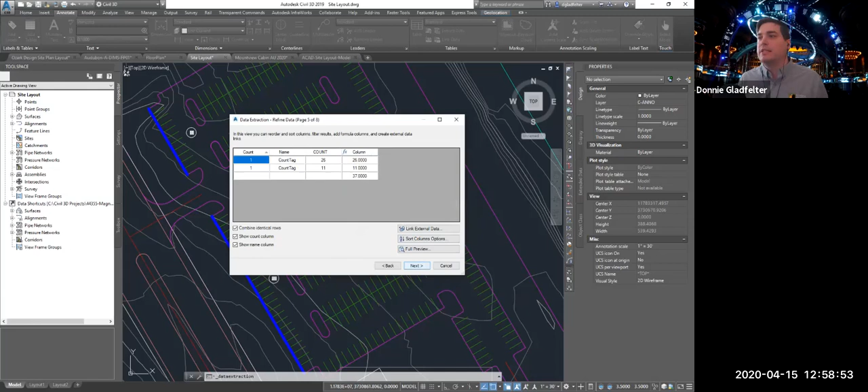I'm going to insert this into my drawing like so, and hit finish. It comes in as a postage stamp, but that's okay. You can see here that it has counted all of those parking stalls.

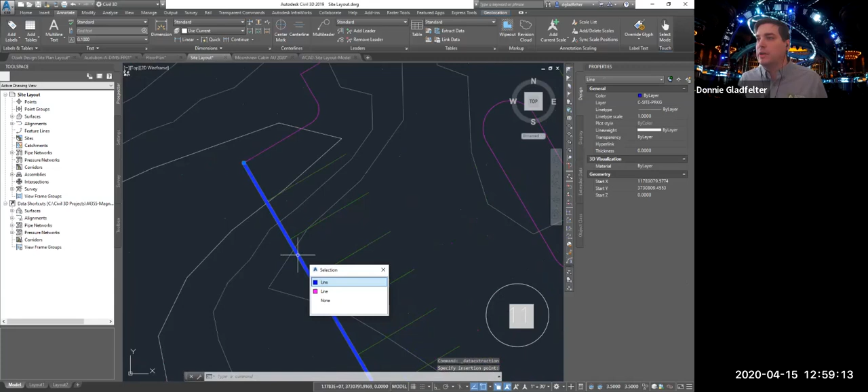What's really awesome is, imagine the parking count changes. I'll pick on this and take off a stall. If I do that and hit regen, it updates to show 10. Over here in my table, it hasn't updated yet, but if you refresh this column real quick, it will update to 10 and update your total parking count.

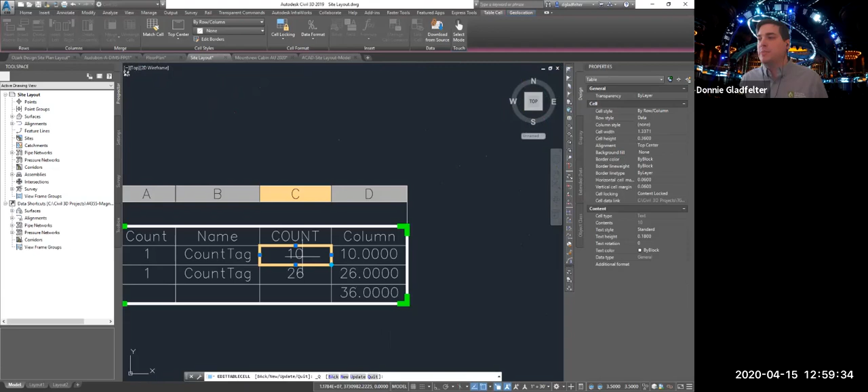So block attribute tables, or data extraction tables, are wonderfully helpful, especially for things like quantities when we're working with just vanilla AutoCAD objects.